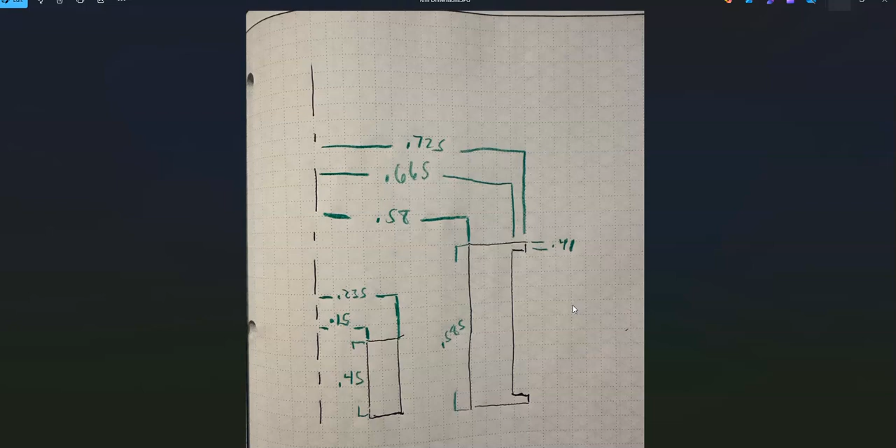The way we'll go about this is I've taken an Automoblox car and a rim, and I've taken some dimensions of the rims, just for the base. This will make more sense later in the video. So what we're going to create in Fusion is just this initial sketch and create a simple revolution.

We're going to go into Fusion and go to create sketch. But before that, I'm going to hit save and call this tire rim, since it's the rim that the tire will fit on. I want to make sure my document settings are in inches, and yes, I'm in inches, that's good.

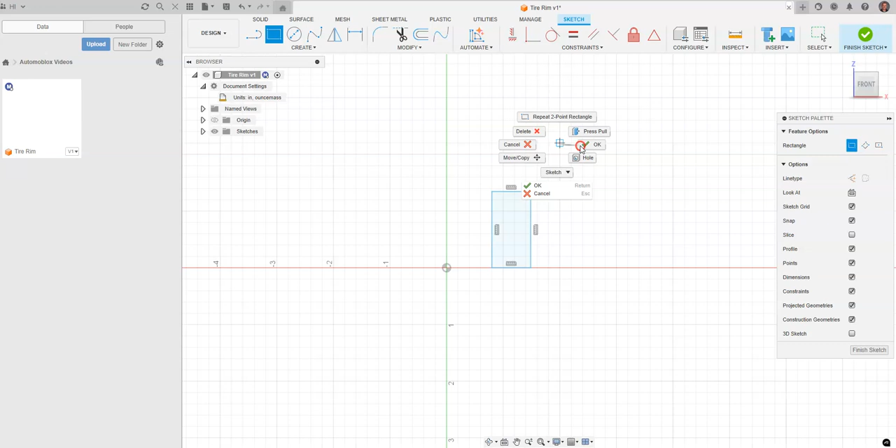We're going to go to create sketch. I'll click on my plane here, and start sketching out some basic dimensions, just a rectangular prism. I don't really care too much about the exact dimensions right now. What's nice about sketching a rectangular prism is everything's in blue - I can drag this around as much as I want. It's not placed yet, only until we start placing some dimensions.

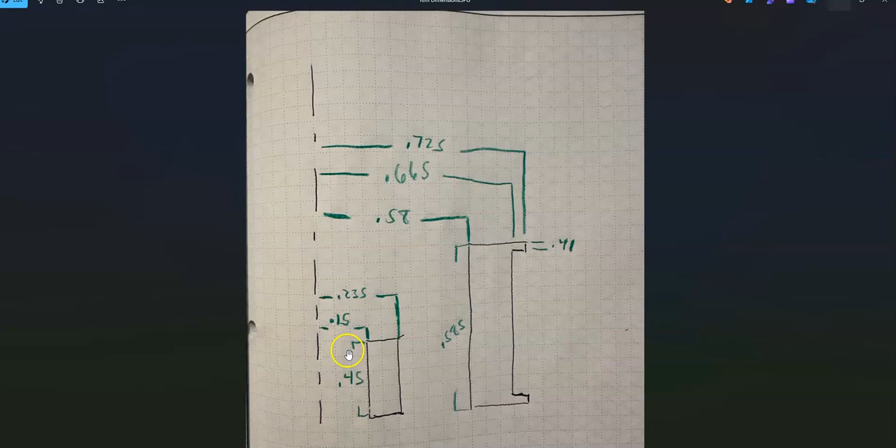We went ahead and got the radius dimensions we'd need. I took a full diameter dimension from the actual rim, but divided them by 2, so all these are going to be radius dimensions. We'll start by putting in just the height, and that height is going to be 0.45.

We're going to grab hold of the dimension toolbar, and click - excuse me, I need to go up and hit dimension again. We're going to click on just the vertical line, enter 0.45, and hit enter.

Now we need a vertical line over here to give a reference point for placing the next dimensions, which will define the size of the hole in the middle for it to fit on an axle, and also the other part over here. So we're going to grab hold of the line command.

Let's grab a line and go straight up. We're also going to grab hold of the center line command, click on just this vertical line we made, and click on center line. You'll notice that has now created a center line for us.

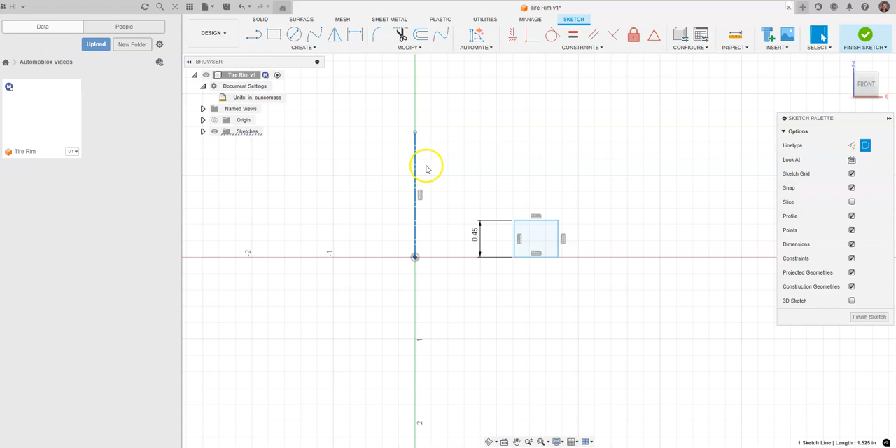When we go in and place dimensions, for instance from the first vertical line over to the center line, and drag up, that's going to give me a diameter here. Now I did radius dimensions, so what we'll do is multiply these by 2.

The first dimension we're going to place in, as it says, 0.15. I'm just going to go 0.15 times 2 and hit enter. Automatically it's going to bring it over, and the diameter I initially took was 0.3.

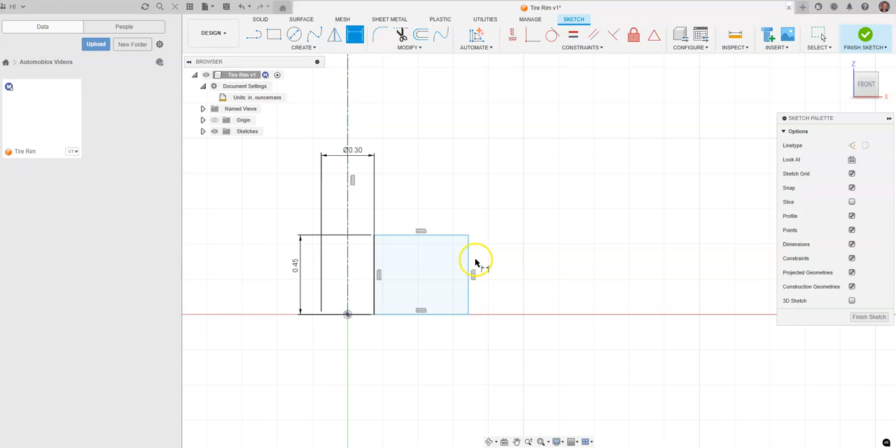Our next dimension will be from this outside vertical line to the center line. Drag up - let's go back to our drawing here, and I'm going to put in 0.235 times 2, and hit enter.

Now automatically we have just this little vertical part on the inside of the rim. What we'll get into in later videos is that this creates a gap for the rim to fit onto an axle. So next we're going to go in and create just this little C shape out here to the outside.

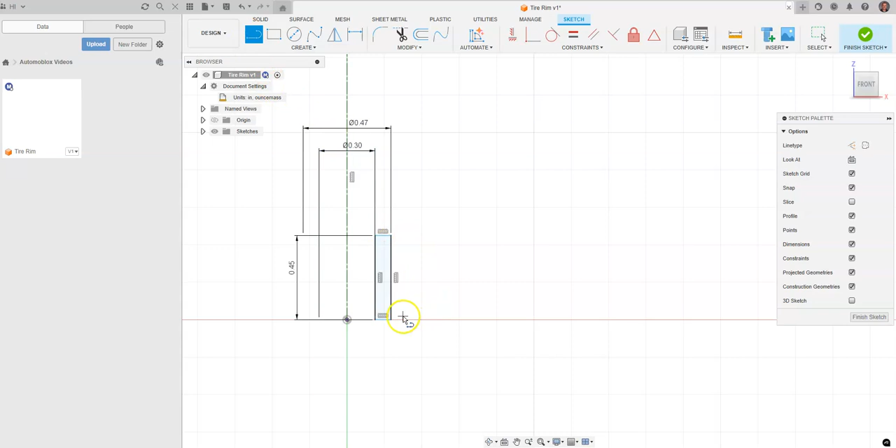What's nice about just creating lines right now is we don't have to make sure everything is completely perfect. We just want to make sure we're creating the initial shape, just the initial geometry.

I want to make sure this kind of snaps out here when I see that blue dotted line. Again, I don't have to be perfectly perfect. I can reference the lines down here at the bottom - there's my blue dotted line, which tells me my vertical line will line up perfectly vertical.

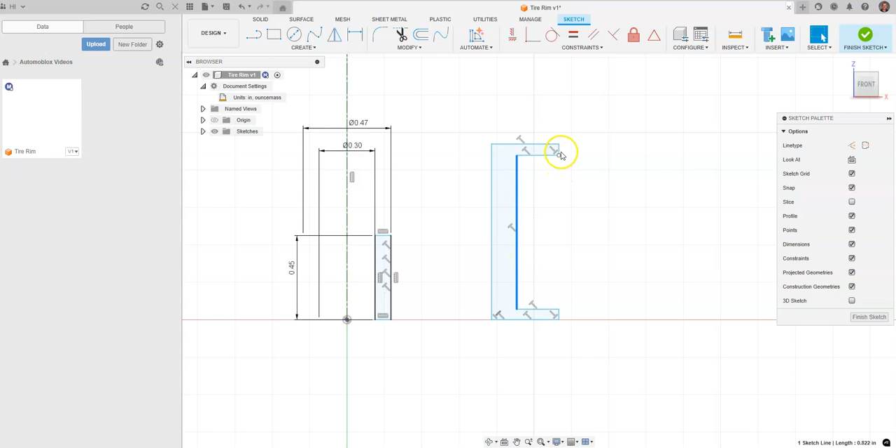And again, we can drag this around, do whatever we wish. When everything is blue, there are no constraints. Notice how it hasn't really given me anything up here for this blue line.

We do have everything that we need to place this into place to make it constrained, but it's still telling me there's some other things I could place down here at the bottom, not necessarily super important for our design. Just for the sake of the video, I'm going to drag down these dimensions right here so we can see everything above it.

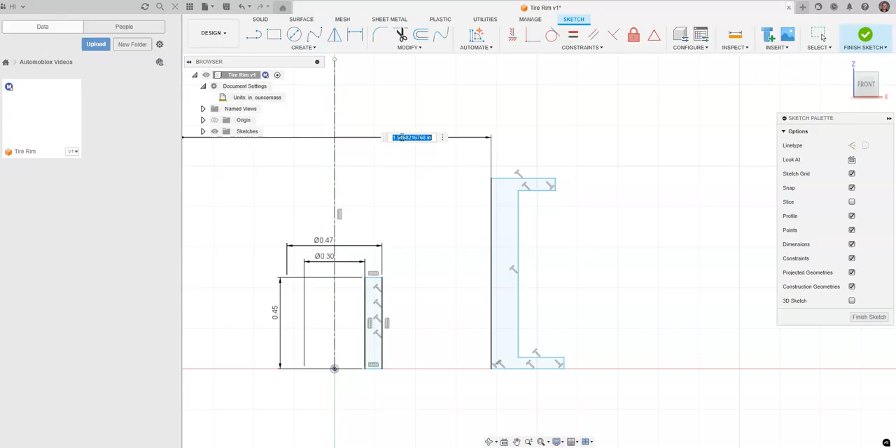Let's go back to our sketch. The next dimension we're going to place is this 0.58. We're going to go to the interior vertical line of our little C shape over here, and go 0.58 times 2. Let's go to dimension, click on our vertical line, click on our center line, come back up. 0.58 times 2. Enter. Brings it right over.

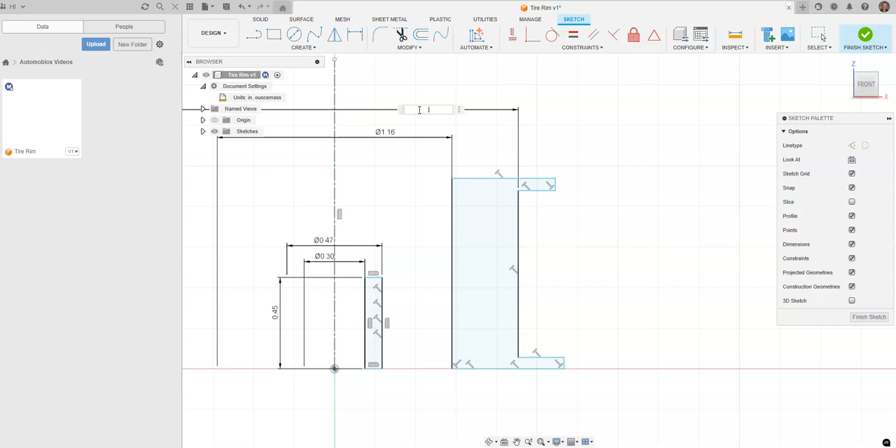Notice how this is pulling everything closer towards the center. Now, I could drag this over, but it's kind of nice to just place the dimension and watch how our dimensions come to be after taking dimensions with a dial caliper from an object. So we're going to go back to here, and I'm going to say it's 0.665 times 2, and hit enter. Jumps right back.

Next one we'll do, furthest away vertical line right here to our center line. We're going to come back up. I'm going to put 0.725 times 2. Hit enter. Now notice how the bottom did not go along with this, and the bottom just stayed down here. I don't have to go place another dimension. I can just grab a hold of my vertical constraints.

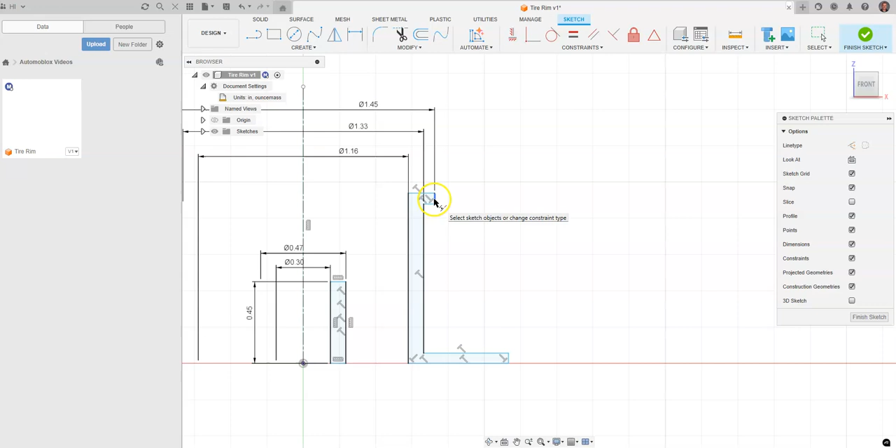What I want to do is create something known as a collinear constraint, and I want this top line to be collinear with the bottom line. So we're going to click on this line first, come up and click on the line up here at the top, and automatically now they will line up. If I were to change this dimension up here, both lines would stay collinear.

They would stay together. Now the only dimension I have left to place is just my vertical dimensions, right in here. I got this vertical line, I got the longer vertical line, I got the line down here at the bottom. So let's go back. I'm going to do our smaller dimensions first. So we got 0.41 as the height of those smaller lines.

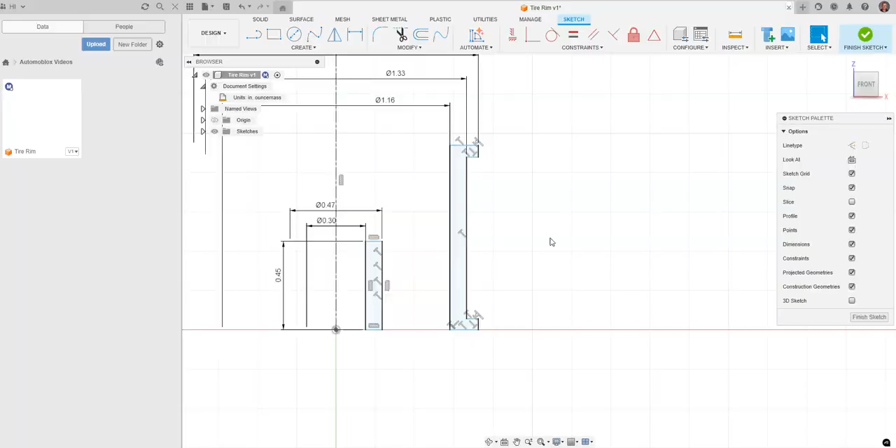I'm going to come to dimension, zoom in, click and drag out, and put in 0.41. A little bit taller than I anticipated.

I'm going to click here, come out. Actually, it's 0.041, my apologies. Let's go back up here. Missed a decimal place, 0.041. And hit enter. There we go. Now that looks right. Thought that looked a little bit too big, just one decimal place off.

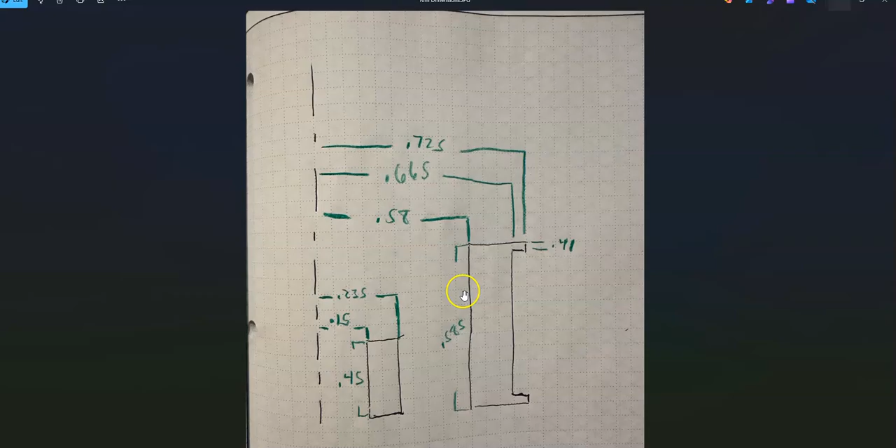Let's go back to our drawing here. I forgot to place that 0 right here on the side. 0.585 is going to be the height of our vertical line here in the middle. Let's go back to dimension. 0.585 and hit enter. We now have for ourselves this little C shape. We got pretty much everything that we needed from our dimensions here, and we have for ourselves a nice center line down through the center.

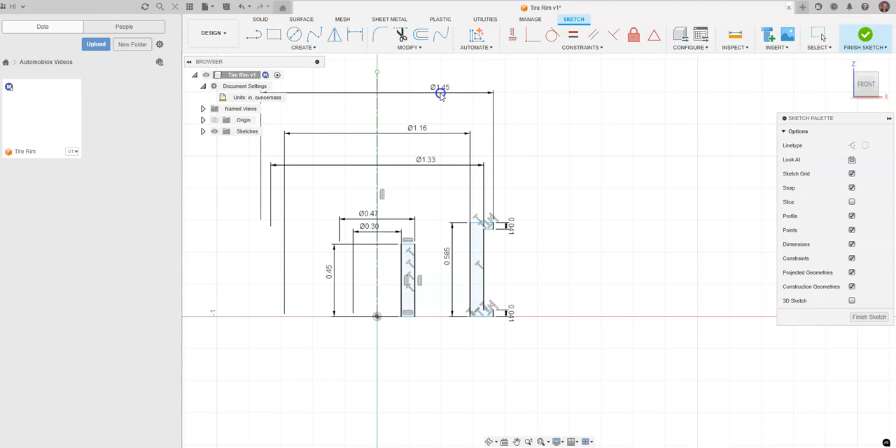Now, if you wanted to make this a little bit easier for yourself, you could just take diameter readings and go right off the center line. I just went ahead and decided to take radius dimensions. Let's go ahead and go to Finish Sketch. And now when I go to Finish Sketch, you'll see that I have myself 2 sketches here.

Looks to me like I'm going to go to my display settings here. Let's go down here to Camera. It looks like I'm in perspective. Let's flip that to orthographic. There we go, nice. We're going to do a revolution.

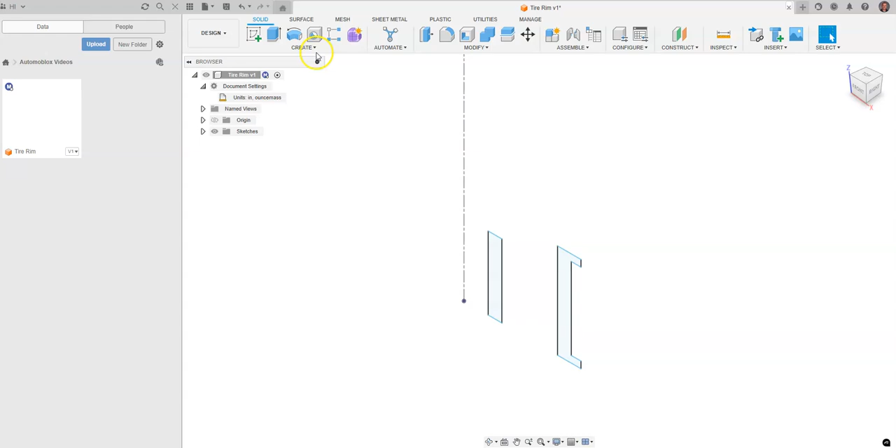Let's go to Revolve. Automatically, for the profile, it's going to ask me for a profile. Notice how it's already selected the axis as the center line. If you have a center line in Fusion and you have closed sketches, it'll ask you basically, so what profile are we selecting, because we know you want to do a revolution.

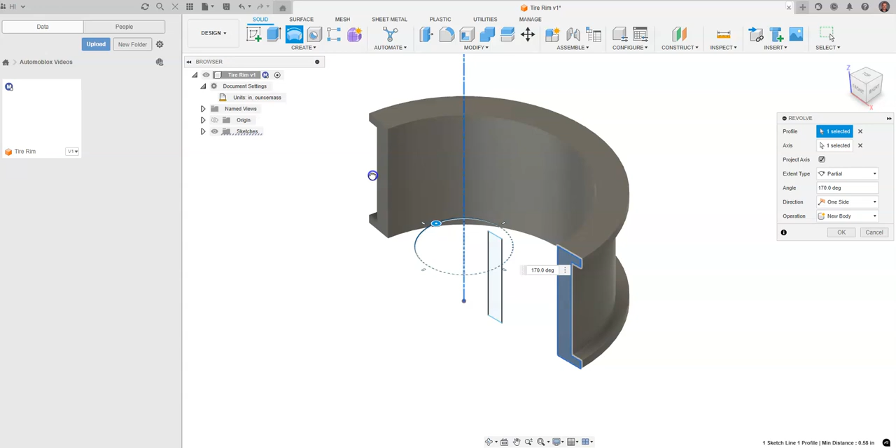I'm going to choose the outside. Notice around here on the outside, we have this little shape right around the outside here, and I can actually rotate this. So I'm going to click and I can drag it around, and notice how it'll go to a certain amount of degrees. Obviously, we want 360 degrees. Go ahead and say OK.

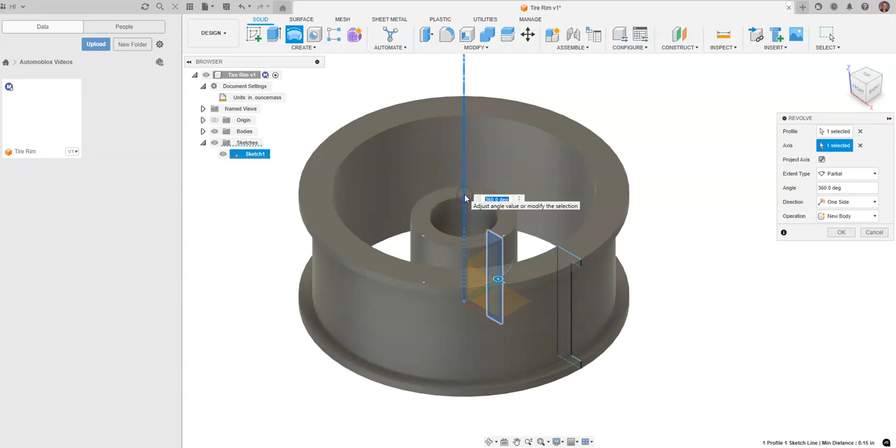We'll go to Revolve. We're going to turn on our sketch 1 over here. Notice how that went away. Let's click on sketch 1 because I want to be able to see the interior. It only lets me do one revolution at a time. So I'm going to go to Profile, select for our axis, go to our center line. Say OK. And now I can turn off that sketch.

And now we have the base of our rim. Again, where we're headed with this is we have just the base here of the outside and this little center part of where it attaches to the axle. This will allow us to be creative and create our own design for the outside of the rim. So we will cover that in another video.

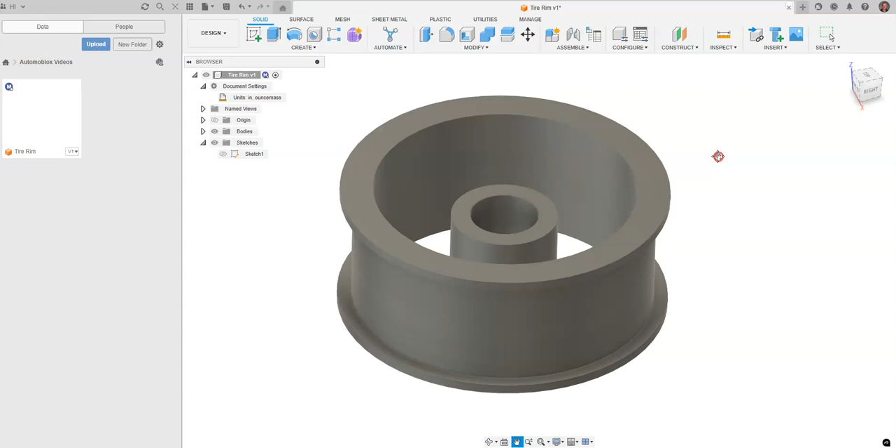So this has been a video for how to go about creating just the base of a tire rim that would fit on an Automoblox car in Autodesk Fusion.